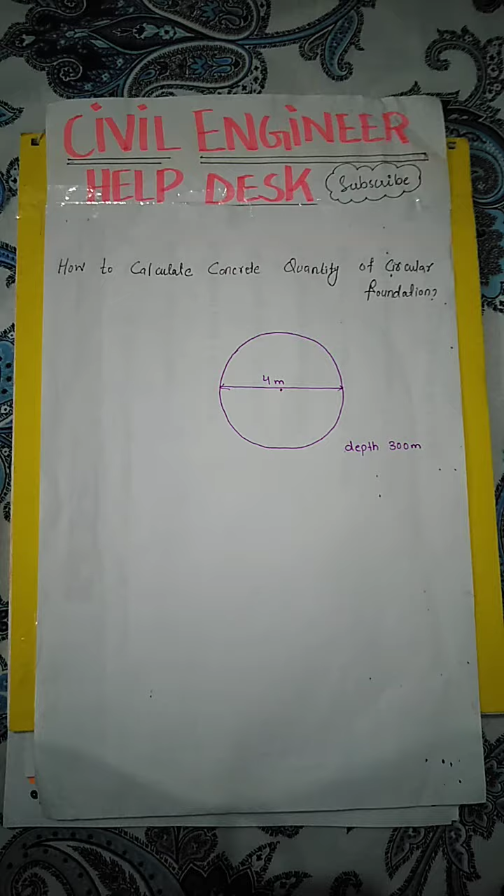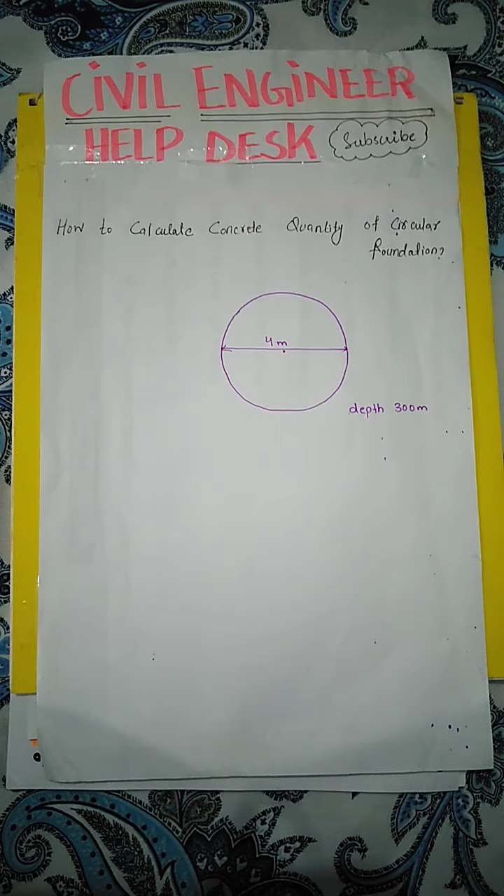Hi viewers, this is Mazhar Abbas with a new video: how to calculate concrete quantity of circular foundation.

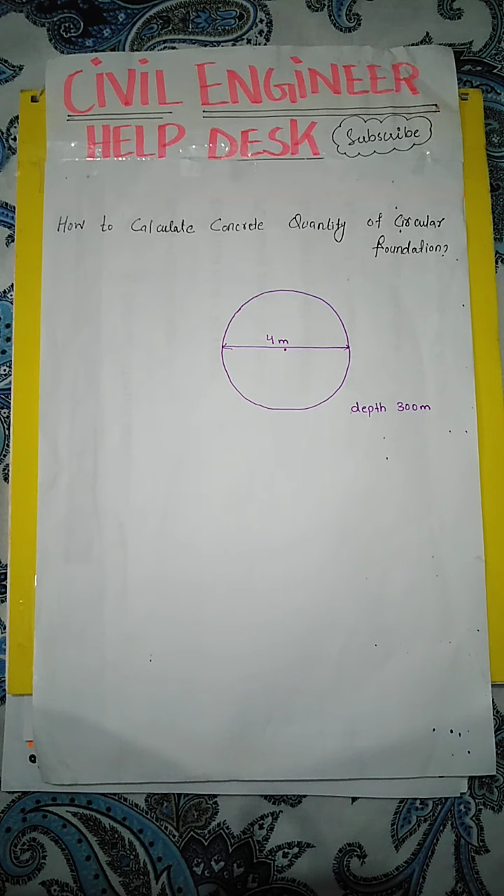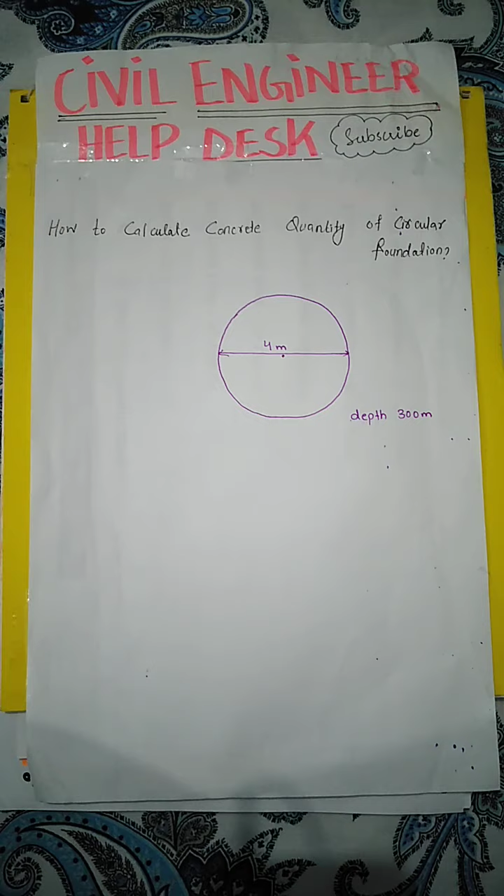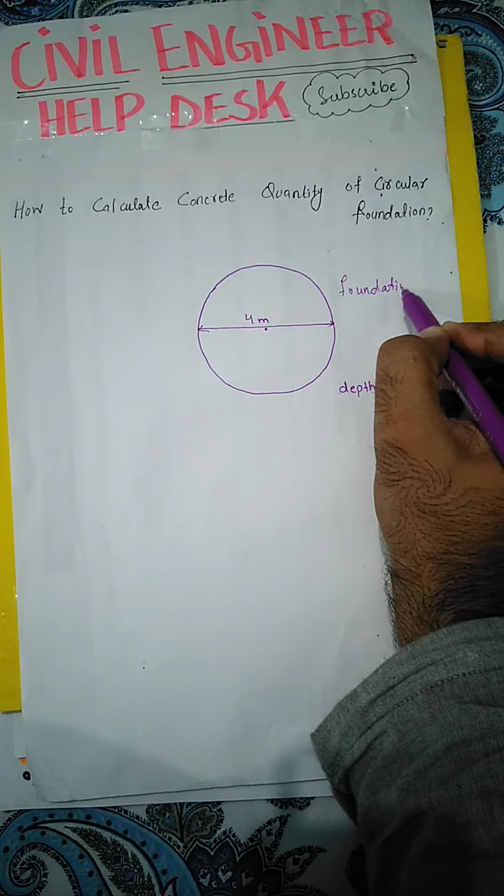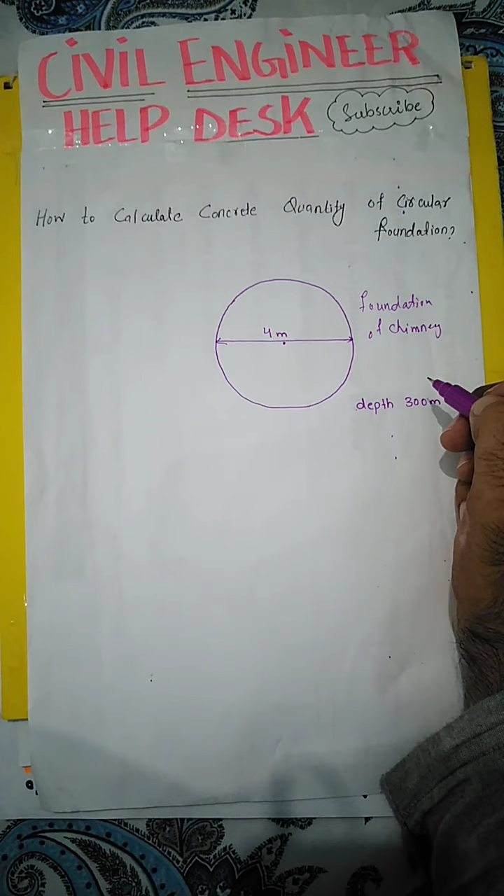Viewers, today our topic is how to calculate concrete quantity of a circular foundation. It is very important because normally the foundation of chimneys, and foundation of boilers or foundation of turbines are usually in circular shapes. So we must know how to calculate the quantity of concrete for these foundations.

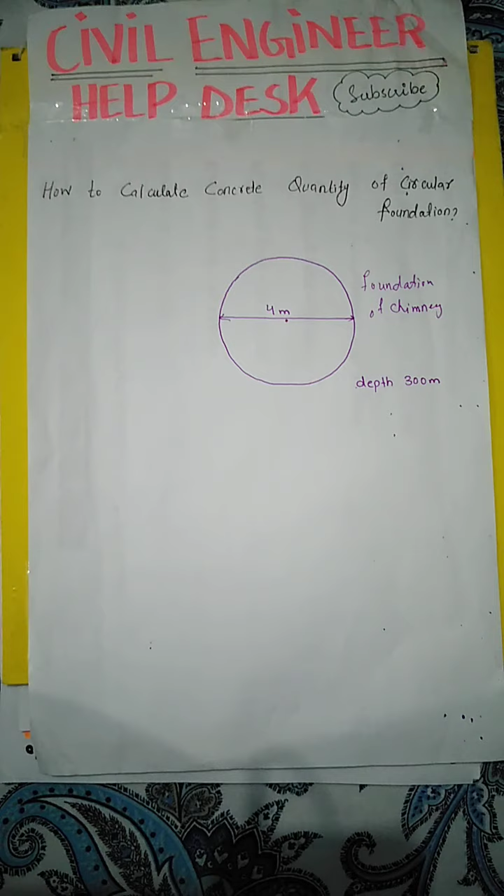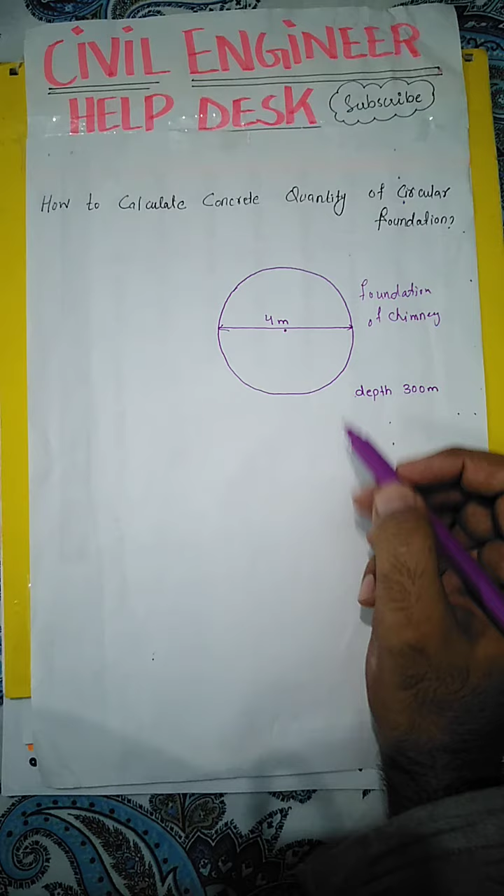We have taken an example, and in this example a circular foundation having diameter 4 meter, and we want to calculate the quantity of concrete for this foundation.

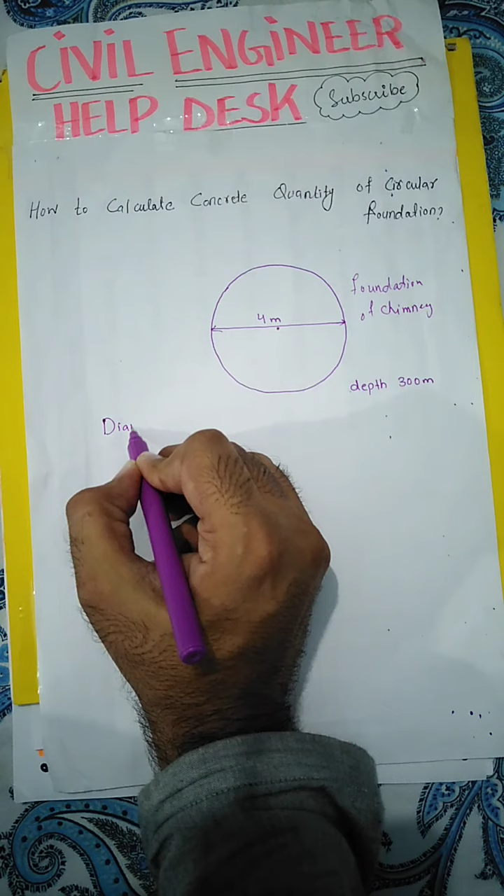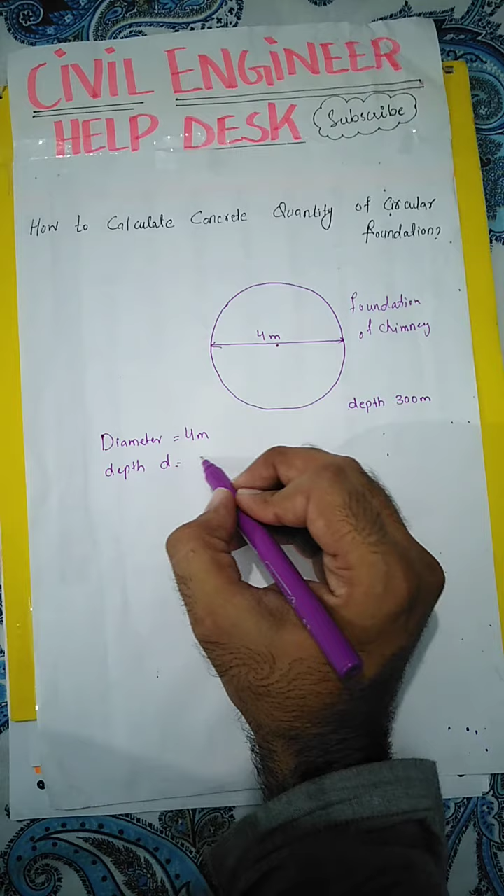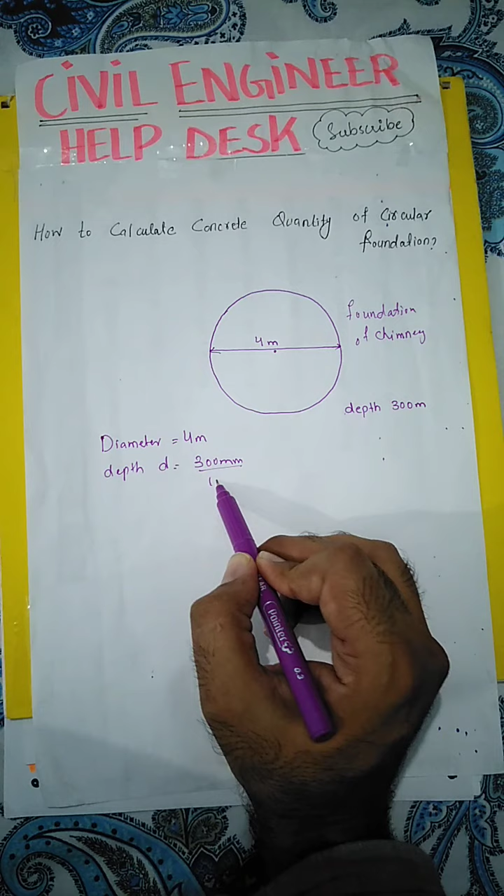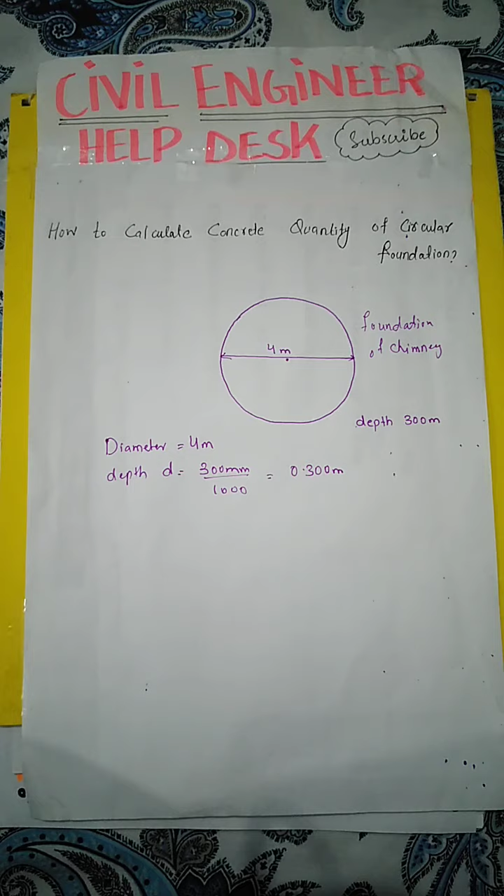First of all, we will make data. We have diameter, which is equal to 4 meter, and depth of this foundation, which will be denoted by small d, and depth is 300 mm. Our diameter is in meter and our depth is in millimeter, so we will convert millimeter into meter. Dividing 300 mm by 1000, we get 0.300 meter.

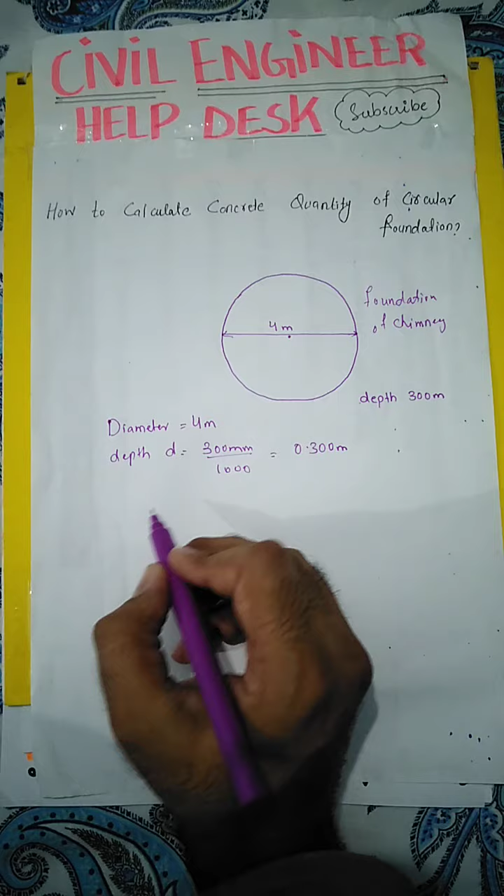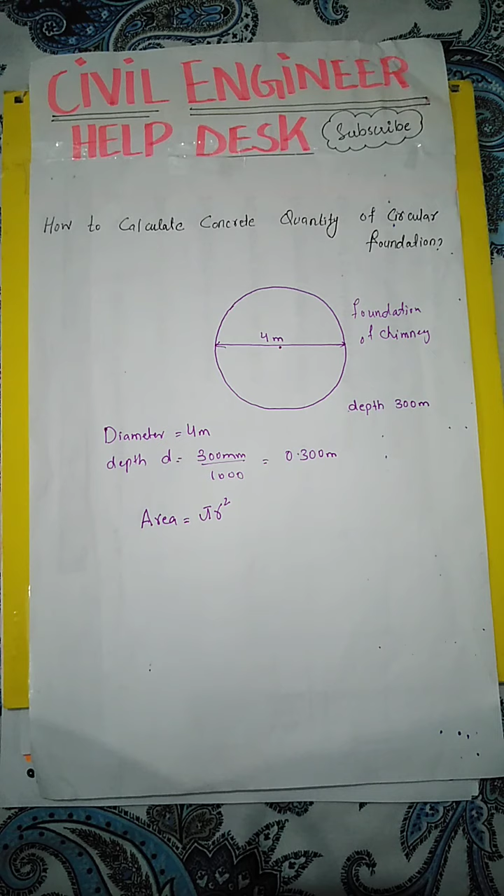Now viewers, if we want to calculate the quantity of concrete in circular foundation, we must know the volume of this foundation. So if we want to know the volume, we must know the area. First of all, we will work for area. We know that area is equal to pi r square. For any circular shape, any body whose geometrical shape is circular, the formula for area is pi r square.

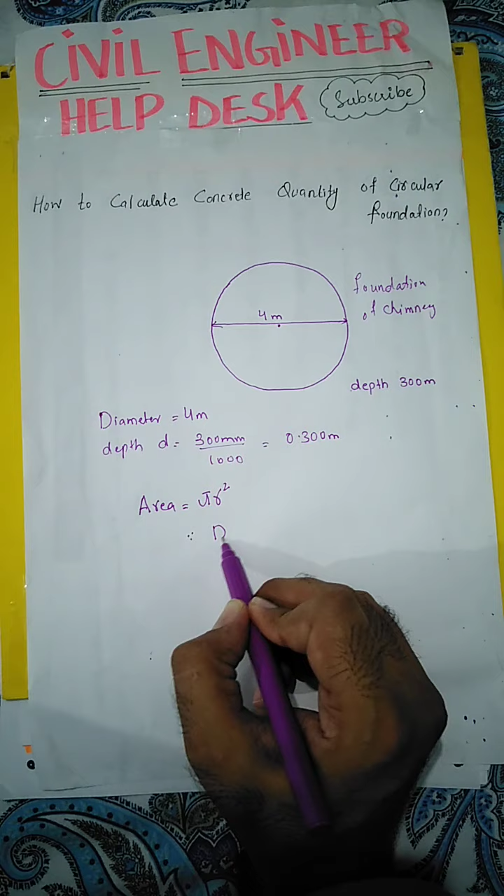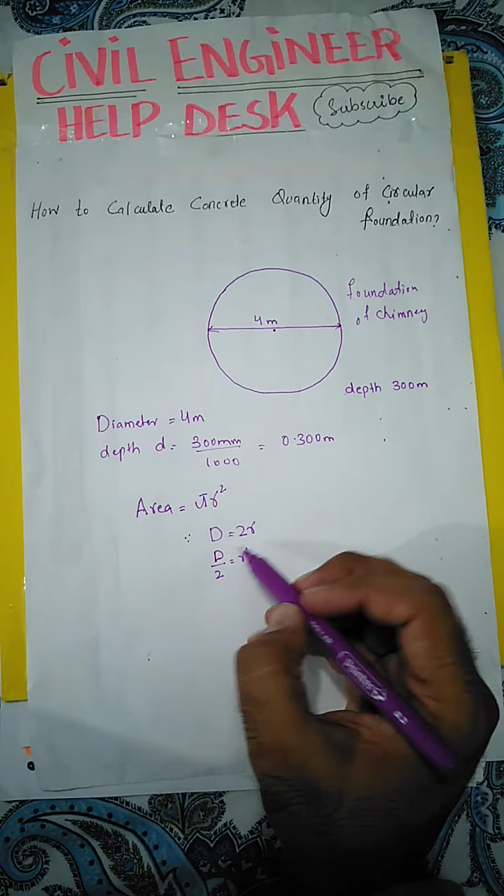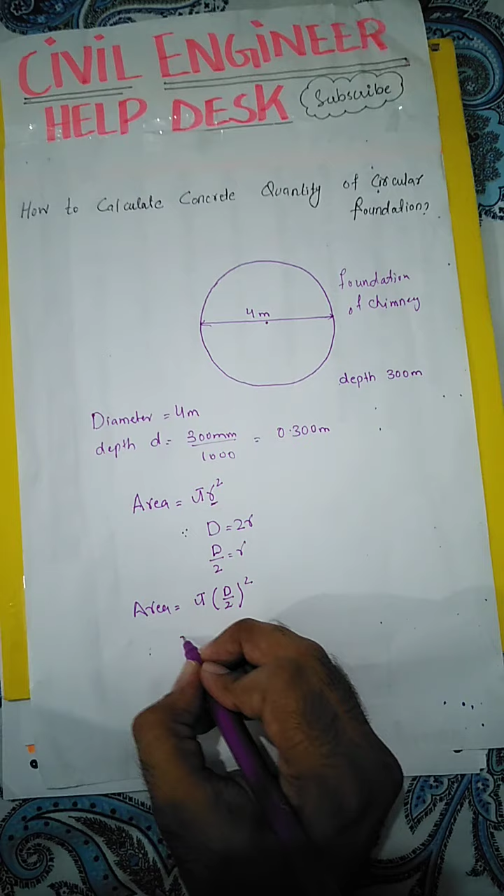Now we know that diameter is 2 times radius, so we divide diameter by 2 and we get r from there. So our radius is equal to diameter divided by 2. We will put this value here, so area is equal to pi times D divided by 2, square. Taking square, D square divided by square of 2 is 4. So this is the area for this circular slab, circular shape foundation.

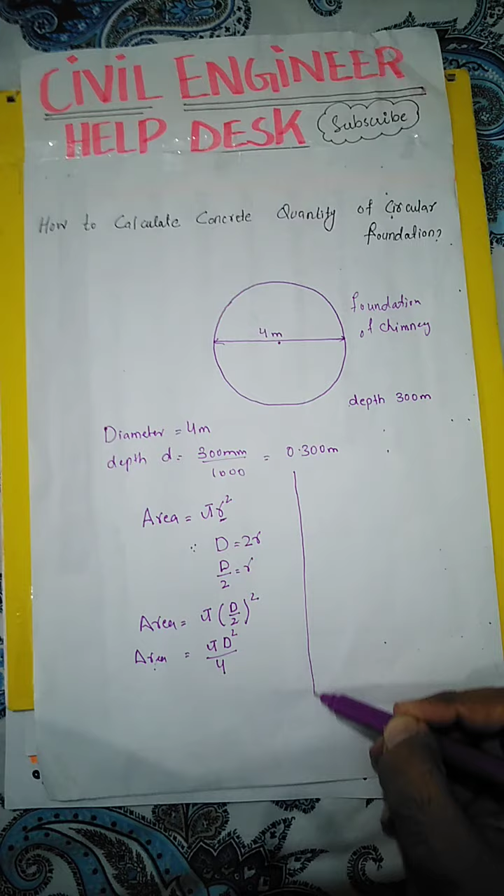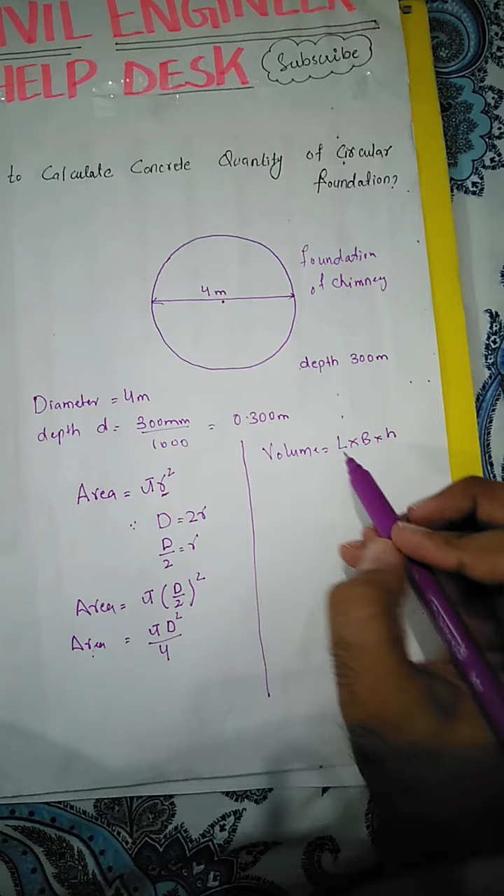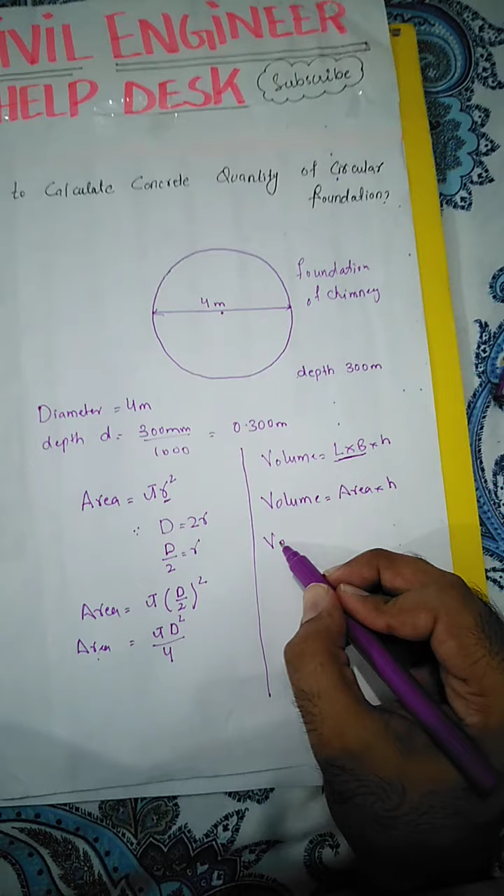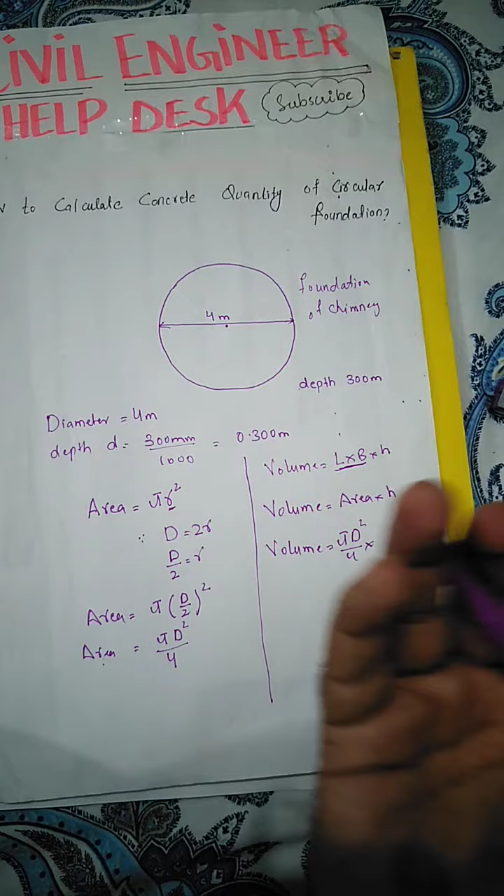So viewers, now we know that volume is equal to length into breadth into height, and this length into breadth is equal to area. So it means volume is equal to area multiplied by height. We know that area for this circular foundation is pi d square by 4, and height or depth for this circular foundation is d, denoted by small d.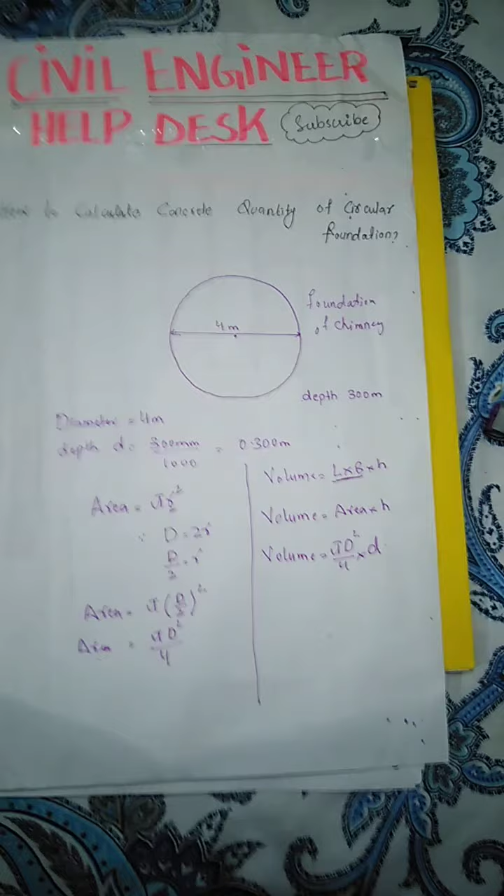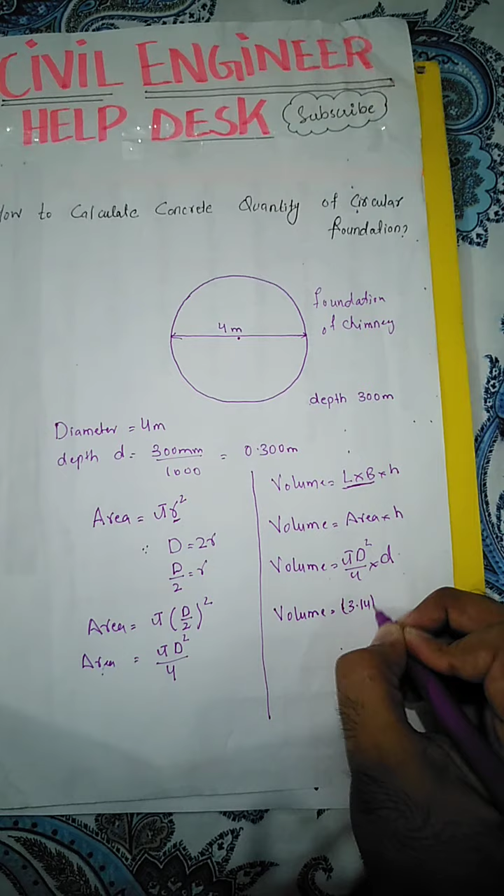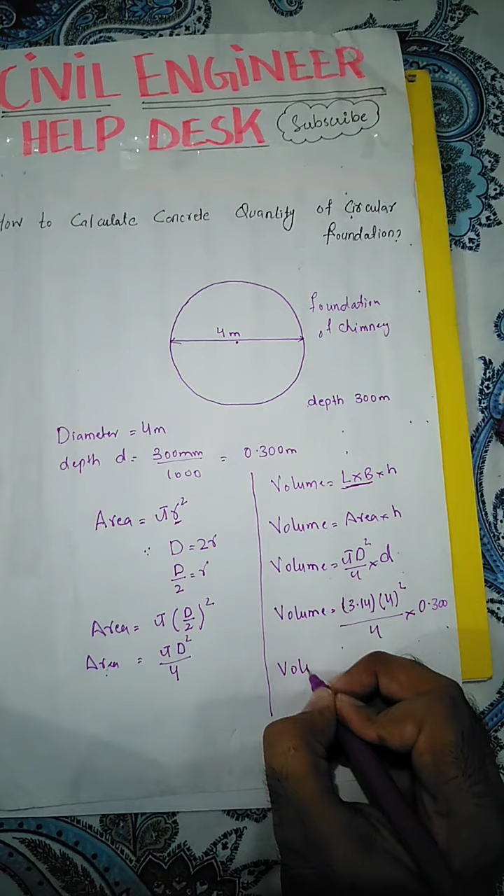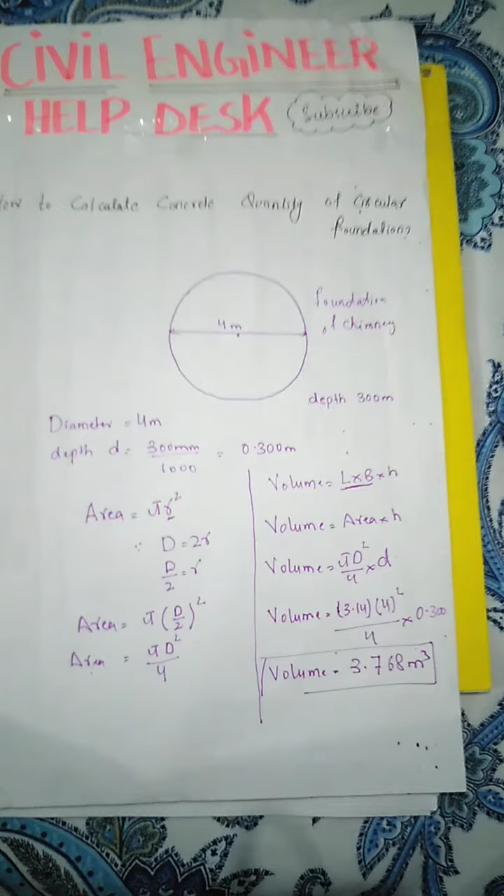Now we derive the formula for quantity of concrete for this circular foundation. Now we have values for these: pi, which is equal to 3.14, diameter, which is equal to 4 as given in the diagram, divided by 4, multiply by depth, which is 0.300. After calculating, we get 3.768 cubic meter. This is the concrete required for a circular foundation having diameter 4 meter and depth 300 millimeter.